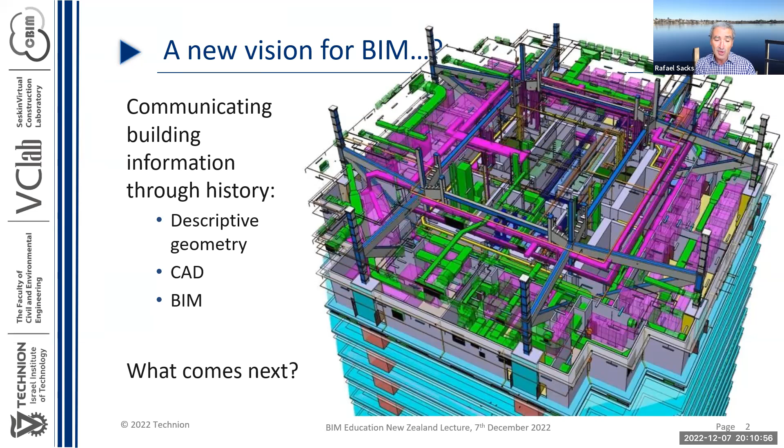So let me just take a moment to look at these 3 things: descriptive geometry, CAD, and then BIM. So I'll start with that historical context, and then we'll talk about current practice and where we are now, what we don't have and what our problems are still today. And then I think I'll touch on technology and process resources that we have available that might help us address some of those problems. And that will lead me to the future trends in BIM technology and process.

Okay, so launching right into it. I mean, we all know that the age of the master builders, particularly in Europe, but in other places around the world too, was a time where communication was rather difficult. Writing and paper were not that common.

And as you can see on the top right-hand side here, oftentimes the practice was to prepare a room, prepare a floor of clay or of other soft earth, and then draw out things in the clay and discuss that in that room, go out and build the thing. And when you needed a new drawing, you would come back, sweep the floor, clean it up, and then start again. That was sort of the graphic communication technology.

And that gave way in the 1700s, in the 18th century, to two key inventions that supported that communication, both descriptive geometry and parallel projection versus perspective views. And this really was quite a technological breakthrough. You can look it up in the link I've given here of Gaspard Monge in France, who summarized a lot of the understanding of what descriptive geometry was.

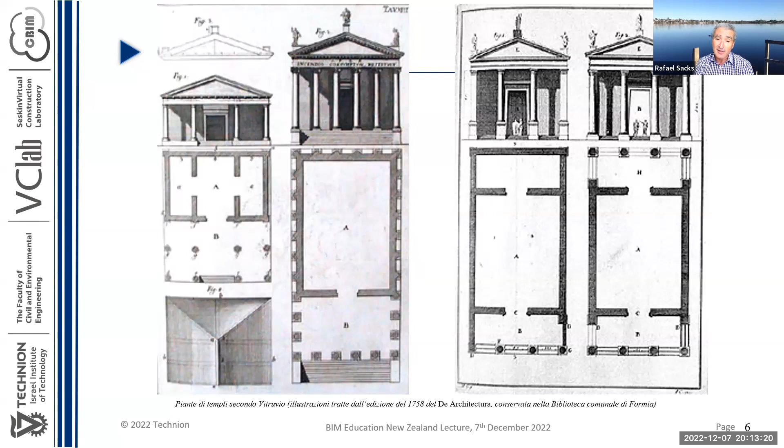And descriptive geometry, of course, also allowed people to prepare front views, side views, top views, and isometric views, all of which were unique in that they could be measured. You could measure them on the paper, and to scale, of course. So we have things like these parallel projections. You see on the right-hand side an isometric view where the dimensions are in proportion to what they are in reality. So that you were able to take a scale rule and work off something like that.

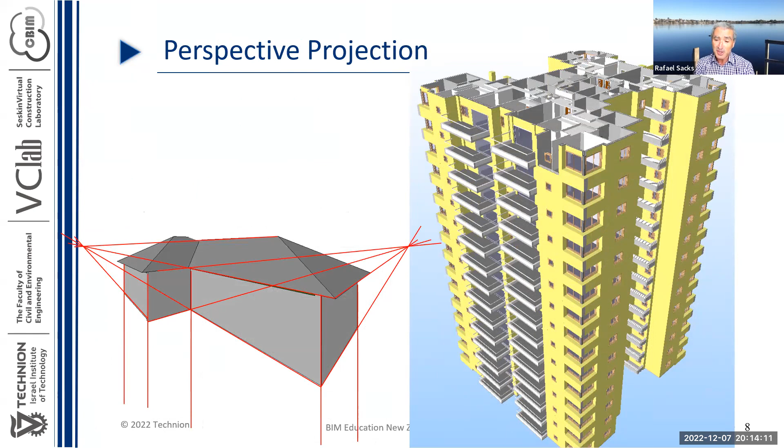On the left-hand side, a cross-section of the same building. And here quite clearly you see how the cross-sections, the dimensioning and so on became possible and led to regular drawings. And that's, of course, in contrast to the parallel projection, the perspective projection of the same building, which would look like this, and where naturally we see things in distorted form, and we could not measure or really use this for construction drawings.

And then of course, people took the technology of parallel projection and descriptive geometry and the layout of mechanical drawings and applied them with computers. So we got CAD, computer-aided drafting, which fundamentally took a mouse and screen to replace the pen and paper. But from a conceptual point of view, it's pretty much the same thing. Of course, it comes with huge efficiencies and accuracies of dimension, but not a whole lot more.

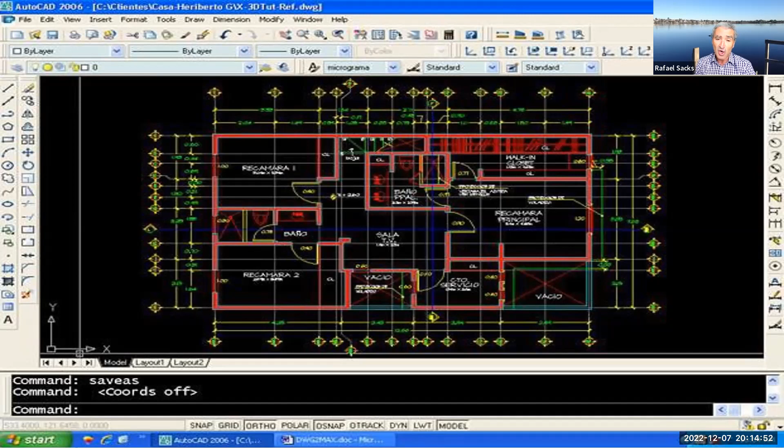And then we take a step forward, at least in imagination, if not in practice. This is a piece from 1962, which I guess I won't surprise too many if I tell you is the year I was born. But it's a piece that was done for the United States government, for DARPA. And Douglas Engelbart in this paper wrote about a future intelligent architectural agent, computer agent. 1962, a time even before punching cards.

So he's talking here about how the architect can move a pointer on the screen and give instruction to his artificial intelligent clerk to show him a perspective view of the hillside building and ask the clerk questions about, does the building meet code, and all sorts of other really wonderful things being imagined in 1962 as the future of intelligent computing.

And then when you have that perspective that this kind of text was already available at that time, you take a step forward, 13 years forward to Chuck Eastman in 1975, writing about a building design system, a building description system, which again is a computer system to design consisting of interactively defining elements, again, with a mouse and a screen, automatically deriving plans, isometrics, perspectives from the same description of elements.

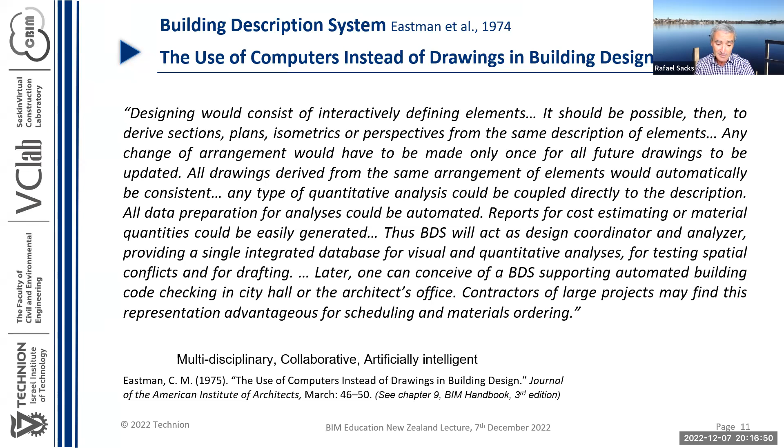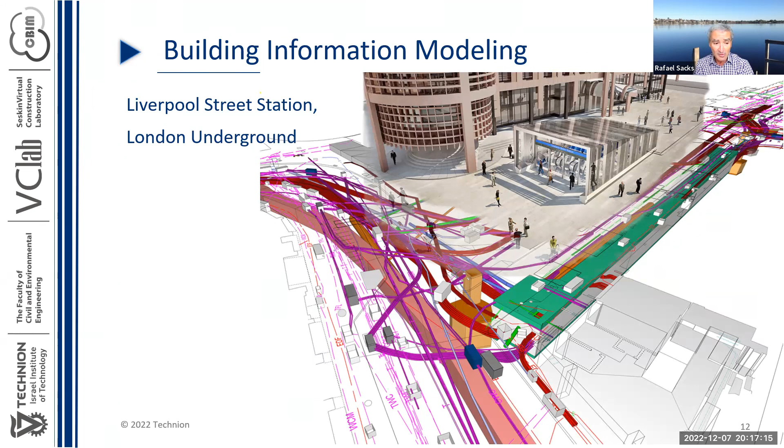Now we sort of more or less take for granted that we can do this kind of thing where not only can we model things in building modeling, we can merge it with GIS systems, merge it with intelligent survey systems, do system comparisons, clash checking, all kinds of weird and wonderful things that are pretty much accepted practice throughout industry now. So we've come a very long way in a very short time.

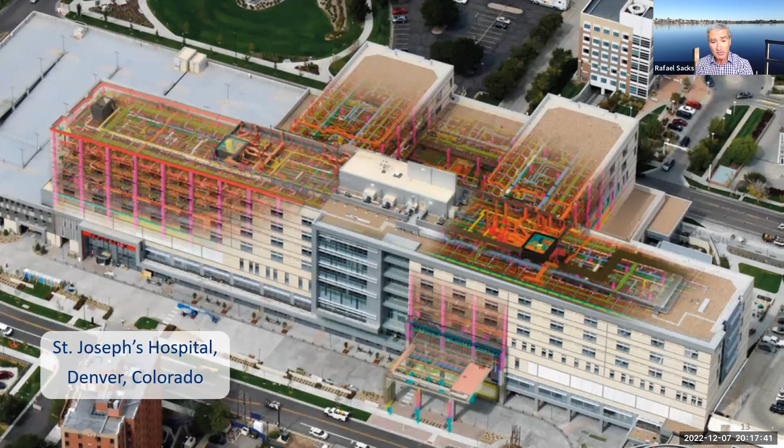You could think of this kind of progression from past to present in this way. This is from the past: publicly accepted standards from the UK from, say, 8, 9, 10 years ago, where they started to lay out this idea that we have level 0, 1, and 2. CAD, of course, being level 0, and then BIM, federated BIM models as being level 2. And again, with a look forward to level 3.

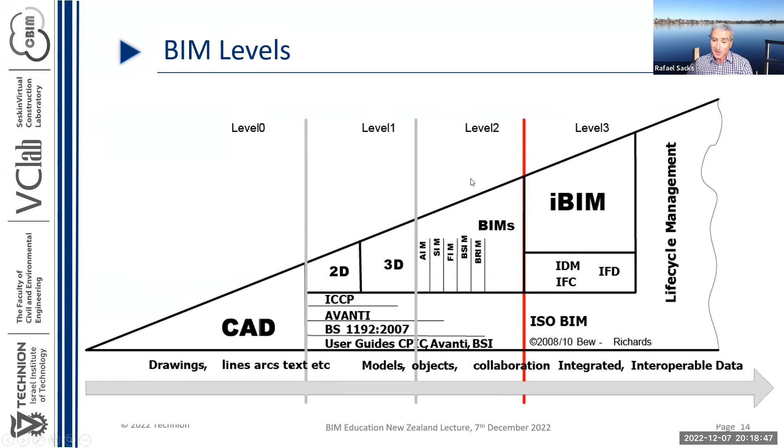And level 3, they broke down in the standard. This has now become updated a number of times, but you see that this iBIM, intelligent BIM thing, is still something that sits in the future, not in the present. Whereas these ideas of IFC and exchange and interoperability, some of them are very well developed. So level 3 is not one single thing, but it's perhaps how they viewed in 2010 how things would develop. The industry, I would say, is largely sitting at level 2 with a bit of IFC and interoperability thrown in.

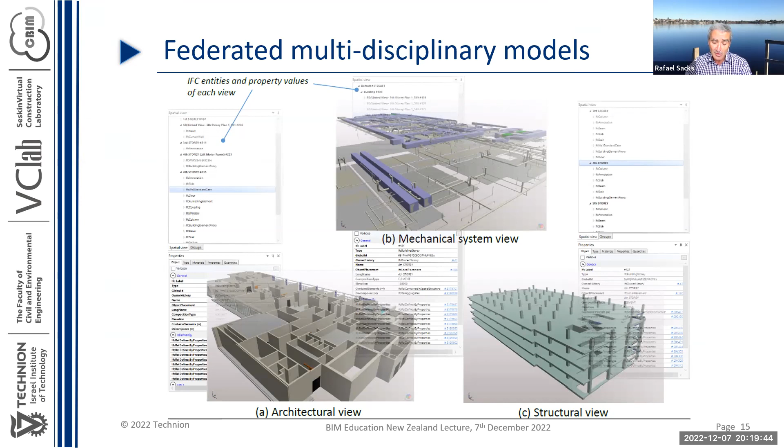So that plays out as these federated models where we have architectural views, structural views, mechanical systems, and each of those run in their own silo, and they're brought together from time to time to compare, to check, to coordinate, and then back to additional cycles of coordination and design. And most of that now is crystallized in the processes described in ISO 19650. So that's become standard practice for industry, and I think it's fairly well recognized. The use of common data environments for storing files, for then comparing files, and the procedures for working backwards with BIM collaboration formats and checking things and revising those components of the federated models.

You can see it here. This is from a building in Singapore called Maple Tree. Again, 2015, 2016, fairly recent, but already this idea of combining federated models is well established. And of course, we've been dealing for some years with this problem of interoperability. Some years, I mean, something like 30 years. And we see clearly that even today, we have multiple software working on BIM in one way or another.

They serve a great number of purposes, but it's not coincidental that things have evolved in this way, in the sense that different professions in the building industry have very highly specialized ways of working. And so those specialized ways of working lead them to have different conceptual understandings of the way buildings work. And that means that the software which embeds a discipline-specific ontology for each discipline have to be different. They work in different ways, they respond in different ways, and they allow the objects within them to behave in different ways, which means we have different software.

And then the challenge is to communicate information from one to the other. And that's challenging because the schema, the ways we understand the information, are different. Not to mention that we have confidentiality, privacy, legal considerations, and other things, and provenance of information and liability. So right now, most of the solutions we have fall into one of three categories: either direct interfaces between applications, where somebody writes an export for a particular software. We also have situations where some of these multitude of software applications have versions which can be embedded directly in a BIM authoring platform.

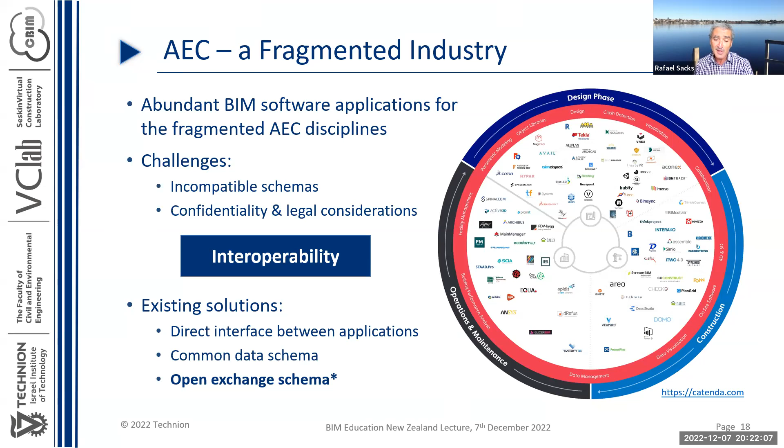And we have common data schema, like the open schema of IFC, which allow you to export and import from a neutral, widely accepted standard schema. So you have things like this kind of flow, where we use IFC within a workflow that begins mostly with architecture, export of IFC files, and then importing to structural software, mechanical software, others, export again, clash detection in some sort of special software, and then repeat the cycle and so on.

And as I said, the IFC itself is in ISO 16739, but this cycle of checking and delivering information and so on is encapsulated in ISO 19650. And so it's become fairly well established. Countries and companies, and projects for that matter, have BIM execution plans. And these are fairly well established, but they're not without their problems. And those mostly have to do with the fact that we have sequential design. Things are done in series rather than in parallel.

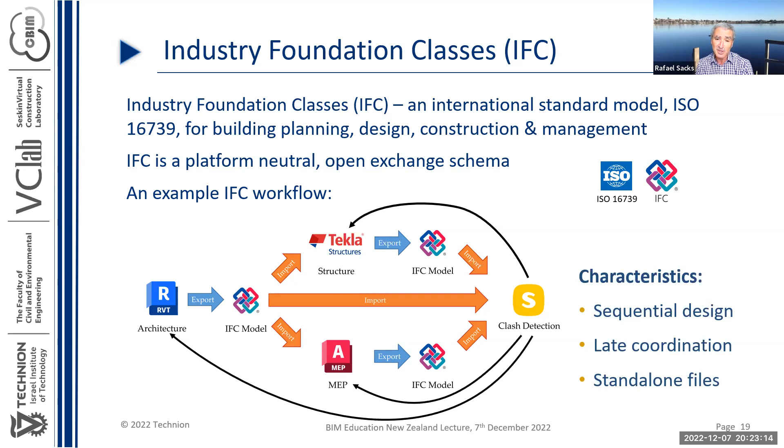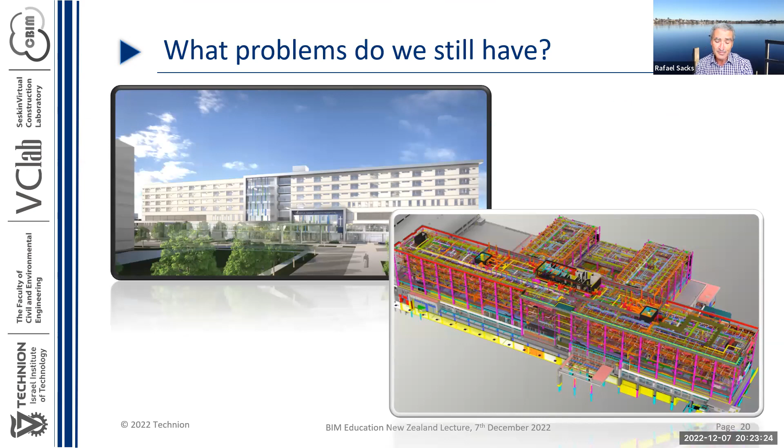We have very late coordination in the process, and it's iterative. And we have standalone files, which really don't contain much information beyond the very narrow scope of each particular profession. So we can ask, what kind of problems then do we still have? And I'm going to list three or four.

The first one is this thing that we know from the old days, let's say, that we still have this fragmented nature and the idea of passing things over the wall from one step in the process to the next, or from one profession to the next. And in general, a lot of rework, a lot of iteration, lengthy times for project development and construction. And in the end, often clients who don't necessarily get what they expected or what they wanted.

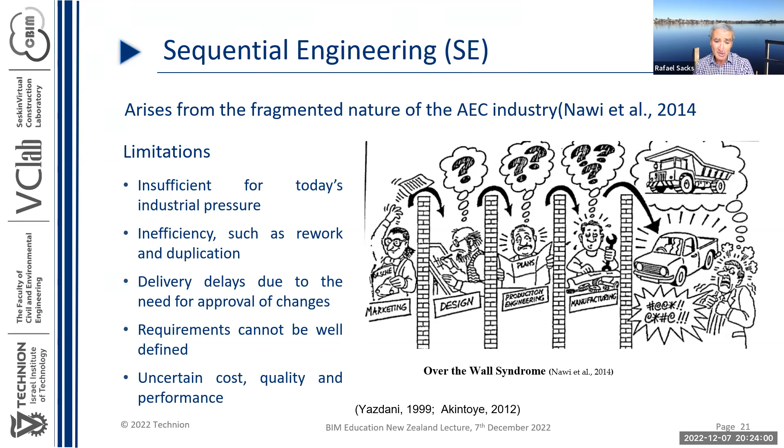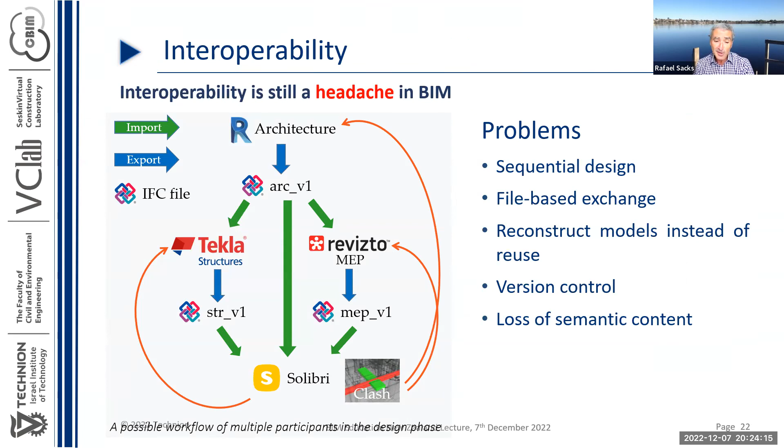And with some of the problems listed here, these are not new problems, but they seem to be fairly persistent. And as I said, interoperability is to an extent solved, but not entirely. And we have these problems of reconstruction and handing over and loss of information, especially loss of semantic content. And what do I mean by that?

What I mean is that, if you consider a Revit model, then within the Revit model, the objects have certain behaviors which are constrained by the way the software is built. Columns support beams, beams support slabs. If there are overlapping volumes in a structural model, the software is intelligent enough to do joins of that geometry and to take care that it's not reporting double quantities for volumes that overlap. By the same token, in an architectural model, it may mean that there is no meaning to a window outside of a wall, and so they don't exist outside of walls.

And that kind of design intent, a design understanding of behavior, is maintained automatically by the software. But then you come along and do an IFC export, and you lose a lot of that. So you lose the parametric geometry, you lose the aggregations, the parts sometimes. You may lose the functional relationships, but in particular, you lose the constraints, the parametric constraints. And by parametric constraints, I mean exactly those things that dictate the logic of the way the building works for each particular design professional domain.

Let me stress this even more, because it's not only that you lose semantic content that's in BIM software, but sometimes there are aspects of semantic content that were never in the BIM software to begin with. And that's particularly across disciplines. Within disciplines, software does it quite well, but across disciplines, it doesn't do it very well, probably not at all.

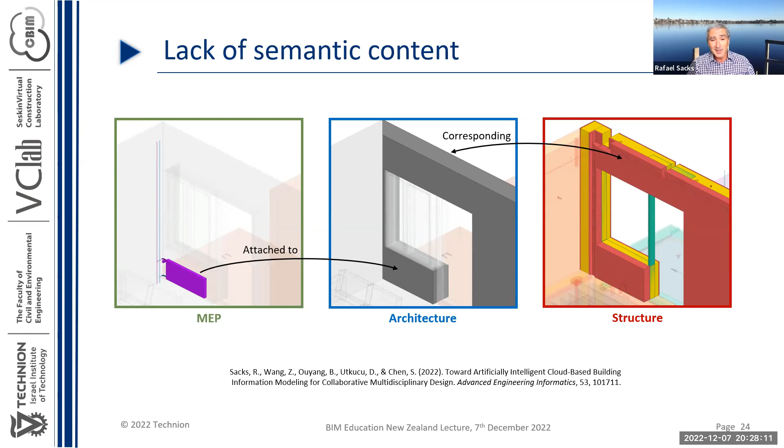So you would at least expect that this kind of change would be accommodated in the software and at least presented to you as something that you could authorize or reject, but you wouldn't have to do the drudgery work of actually moving the stuff or editing it or changing its dimensions and so on.

So I could sum up like this and say that the way we work with multiple federated models is here to stay. That's because of the professional specialization that we have, and that's not likely to change. The fact that models lack semantic content is a block, because it limits the degree to which the software can actually respond and do things that we expect it to do.

Concurrent design, as a result, is still very difficult, and that's part of the reason why we have sequential design. We would rather wait until the architect does everything before I do my structural design, because then I assume I will make fewer changes and I'll have less drudgery and less need to maintain consistency when things change.

Managing design variations is very cumbersome. If we have different versions of the same thing and we're considering different alternatives, there might be minor alternatives within a whole building, but it requires us to save different files of the whole building, which is truly cumbersome. And collaboration relies on imperfect interoperability, as I've discussed. And finally, the file-based storage, the technology that we use is really quite difficult, because that dictates our difficulties with version changes and consistency maintenance and with relationships across models.

So what next? What might we do to address some of those problems in the, let's say, the medium and the long term? Well, let me give you an example of the kinds of things that we could imagine we might be able to see. And what I'll show you here is a piece of work from a PhD student here in our lab, who is employed by Trimble in Finland at the Trimble Development Center, and very much engaged both in research but also in their product development department.

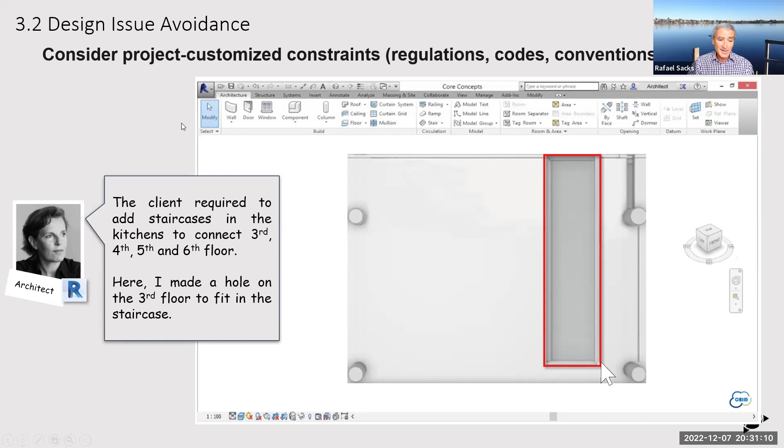And the architect says, oh, okay, I'm going to go ahead and imagine I open up a hole in this floor, and that rectangular hole is going to be filled by a staircase, an open staircase, which people can use to move from third, fourth, fifth, and sixth floors. And so that's the architect's idea in terms of the space planning. And then what happens is you can imagine that the system, the software says, oh, this will cause a design issue with a structural model.

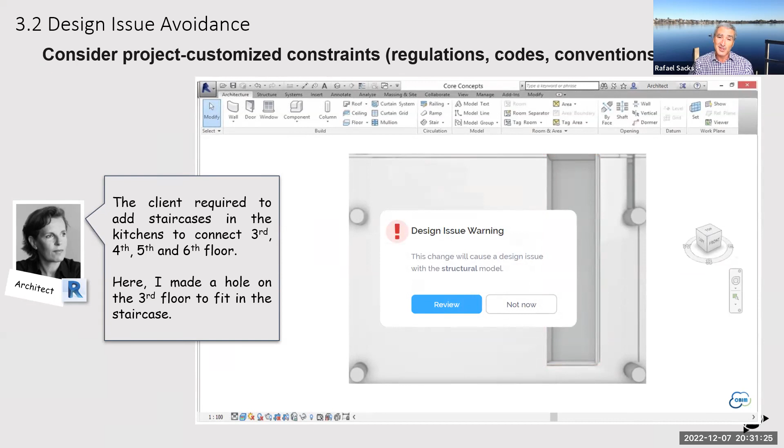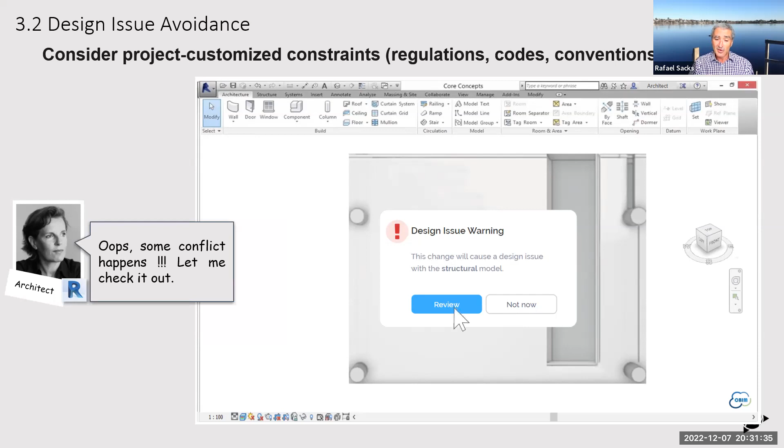This is the intelligent agent, if you like, looking over the shoulder of the architect and saying, I'm intelligent enough to tell you that this is going to cause an issue, and let me show you what the issue will be. So now the architect says, okay, let me review this. So some conflict's going to happen. Let's check it out. So the system then says, okay, let me explain to you what's going on here.

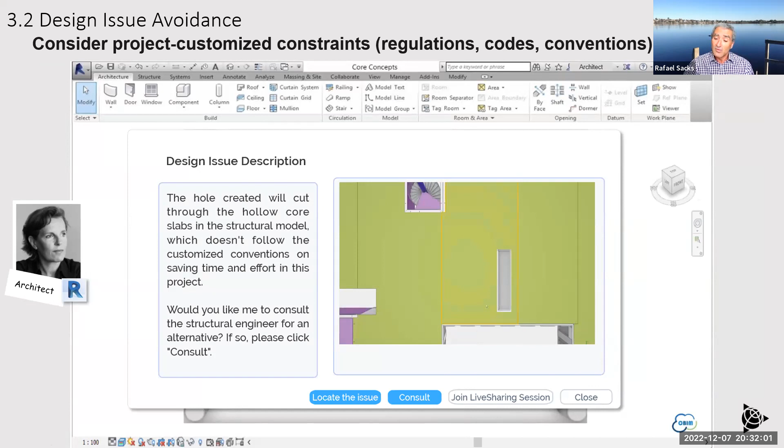Here's the floor of the building, and here is the slab area where you want to change. And if I open up the model in this area, there is a hollow core slab there. And if you cut it in that direction, you're going to cut through all of those hollow core planks, which is a real challenge for the structural engineer to cope with. So what would you like to do? So this is the problem.

So the architect then says, okay, I understand the design issue. Let me raise this with the structural engineer. Now we imagine that the structural engineer is at some other location opposite their software, and they now receive a request. And it says, oh, the architect is busy considering making this change to this building model. Would you like to review, because they have an issue?

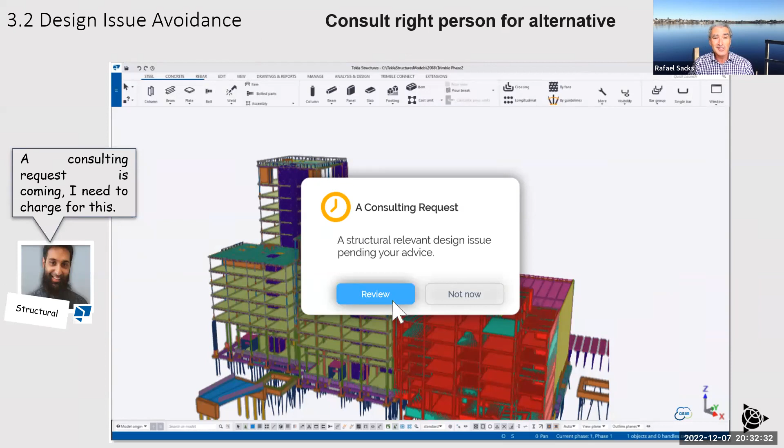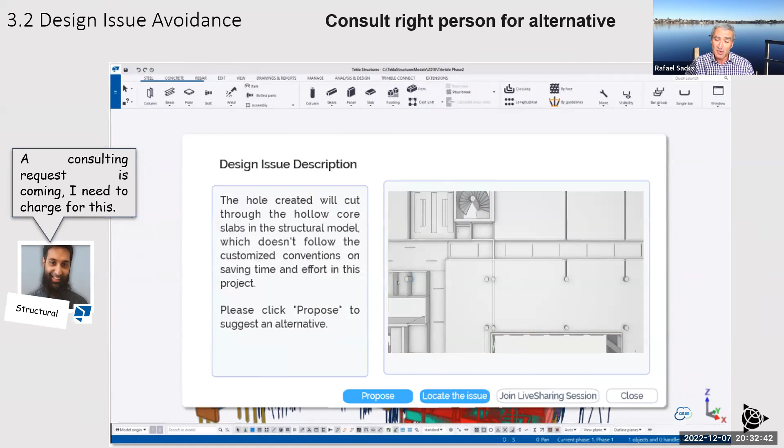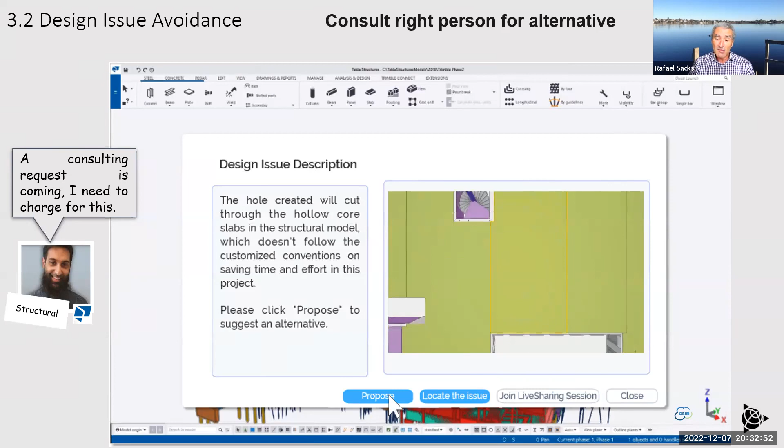And the engineer, apart from thinking, well, I can charge for these hours, is going to say, okay, let's review this. And again, the system displays to the engineer what the potential problem is and what the architect would like to do. And then the engineer would say something like, oh, okay, interesting. How about, instead of doing this, we rotate that opening by 90 degrees so that it's parallel to the thing. So this is the engineer suggesting a fix.

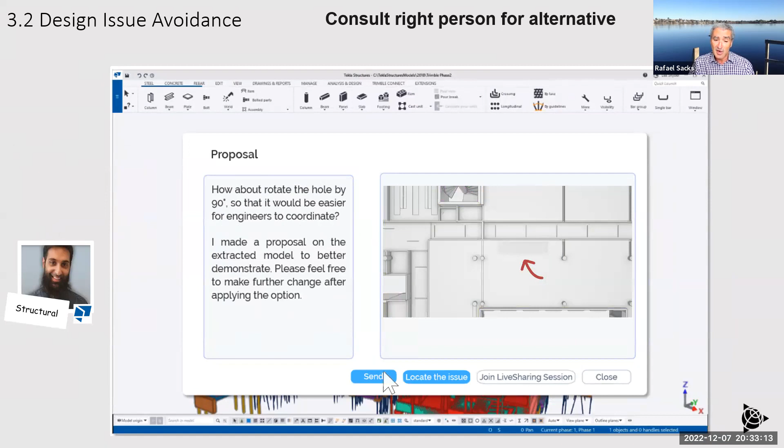And the engineer might say, okay, that's a much better idea, because that's going to be much easier to support that missing plank or make the hole in the area of a hollow core plank. And it's going to then suggest that back to the architect. Now, if we go back to the architect screen, they might receive that kind of communication from the structural engineer, who might say, yeah, you know what, how about doing this?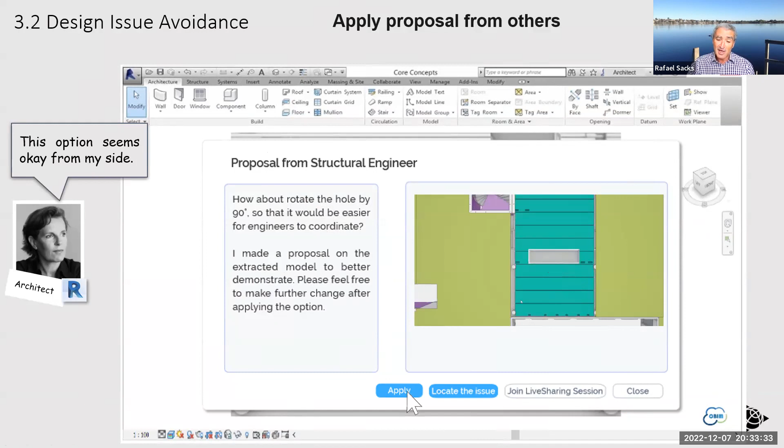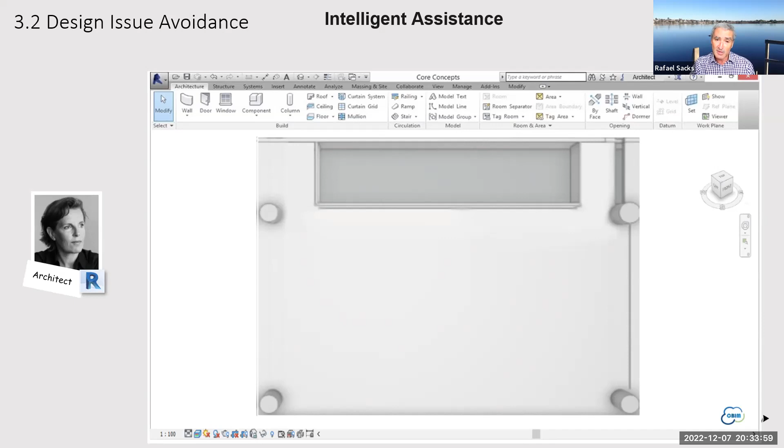And the architect could then say, yeah, okay, I'm happy to do that, and go ahead and accept that kind of fix, and not necessarily in the same place, but adopt the basic principle. And that kind of consultation, apart from being online, could be assisted or aided by an intelligent system that was able to determine that conflict and raise it as an issue right at the beginning, rather than waiting for another month of design cycle and a great deal of work on the part of the architect before realizing that this was not going to fly.

So if we'd like to have that kind of cross-disciplinary intelligent behavior that expresses design intents, what we really want to do is utilize, I think, some of these opportunities. Concurrent engineering, AI applications for semantic enrichment, storing models as objects in the cloud rather than as files, and linking data across models in that cloud. So let me just list these 4 things, because they're all aspects of research over the last 20 years, which have been explored and I would say matured to some extent, some more than others.

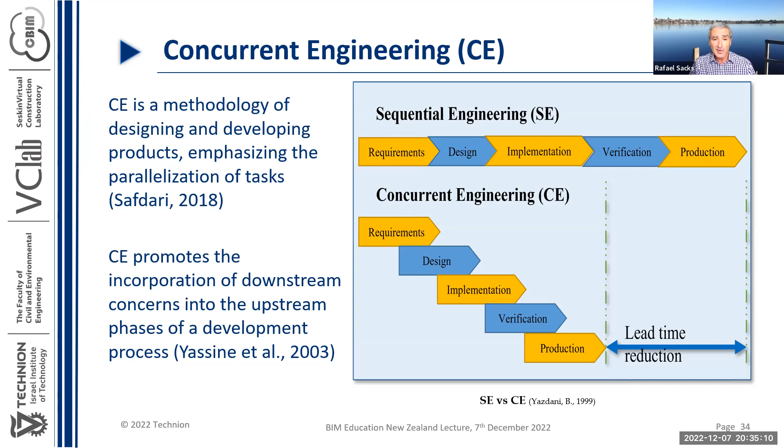Concurrent engineering is basically the idea that we can do things more in parallel than in sequence, with the reductions in duration, but also with improvements not only in duration overall, but in efficiency, and creating less rework and less waste of rework when we design things that afterwards have to be iterated and changed. So we expect to have shorter development times, better product and information quality, lower development costs, and perhaps some enhanced collaboration.

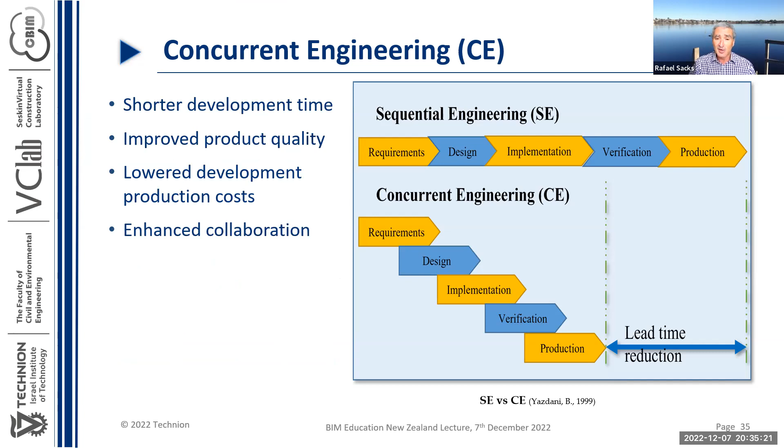Now, semantic enrichment is this idea that you can apply AI tools to interpret and enrich semantic content in an automated way, so that models can, even on export or across domains, express their design intents and their intelligence in an explicit way so that software can read it. I mean, the thing is like this, that if you think about a BIM model, you think of any Revit model or Tekla model or MicroStation or Open Building or whatever software you're using, and you create a model, you generate geometry, you generate properties of those objects, you add that information.

And you probably add some relationships because you have aggregations where, I don't know, a wall may have different layers. A room may be bounded by different walls and ceilings and floors and things of that kind. So you do have that, but there's another whole set of information that you don't model. There might be details with geometry that you simply take for granted that everybody will understand, or actually doesn't influence your design, or for whatever reason you don't model it. There's implicit information. There are implicit semantics as well.

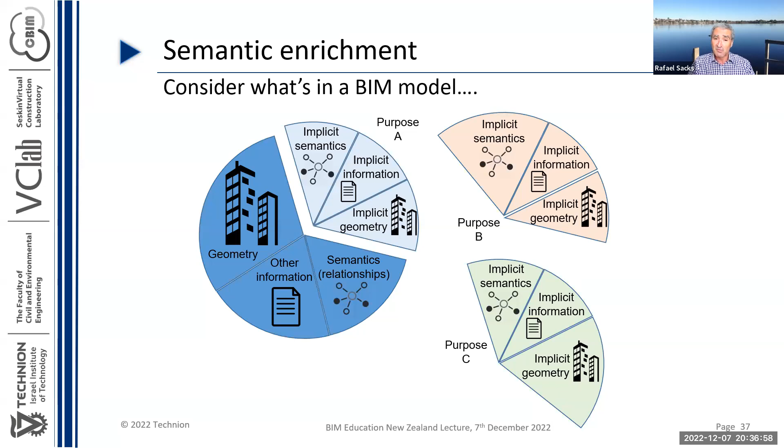And then when you consider that there are different purposes of BIM models, maybe A is architecture and B is structural engineering and C is MEP, to use that triad again, then each of them, although you all may have the same geometries and all see that, you each have different understandings of the implicit information that's not there in the model. Like you take it for granted.

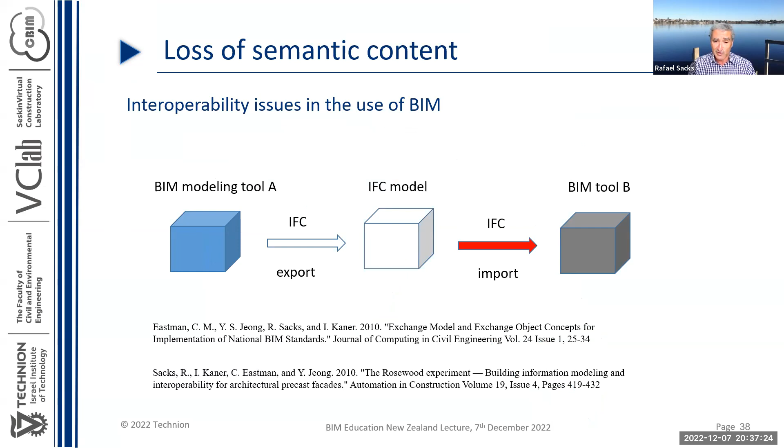So to do a semantic enrichment would be to be able to use AI to identify that and to be able to say, yes, actually, this is the bedroom, this is the bathroom, there is a connecting door between them, and that kind of level of semantics would be added into the model.

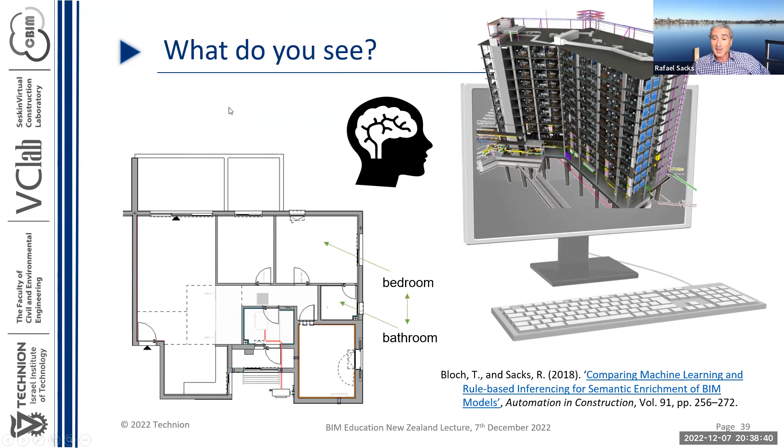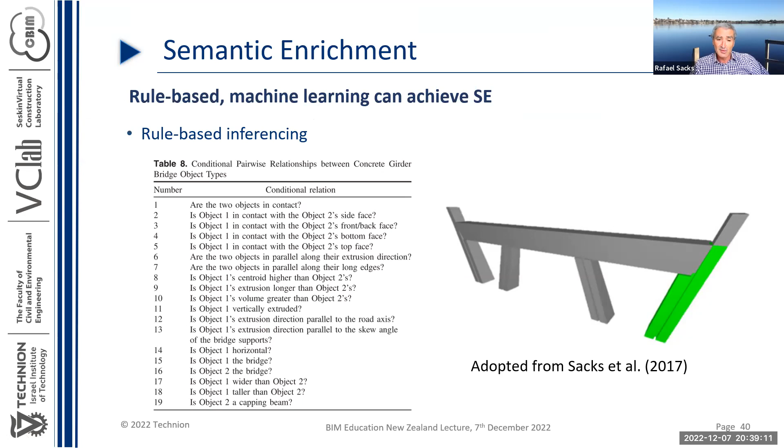We've been trying to do this for some time. We had a project in bridge engineering, and we were able to create sets of rules that could identify components. This is a bridge pier, and the rules could identify the different components with fairly close to 100% reliability, and add in relationships like what supports what, what is aligned with what, and what are the intents of the design.

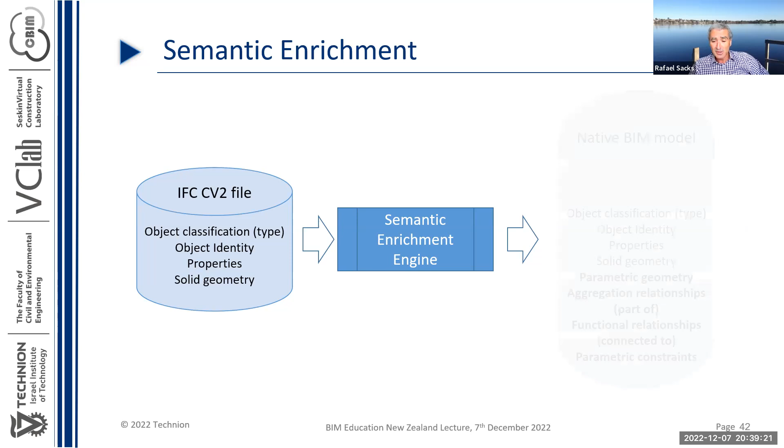So the idea is then very simply that you might be able to take an IFC file that does not have a lot of that implicit information, use an AI tool, and add that back in. And that's partly what I'll be showing in a moment.

And then the next opportunity we have is that people have been working for some time on these ideas. Here's a piece of work from Jacob Beetz, originally in Holland and now in Germany, of having a BIM server in the cloud, where you would not have files but rather objects. And those objects would be delivered or served, if you like, to your own computer on your desk.

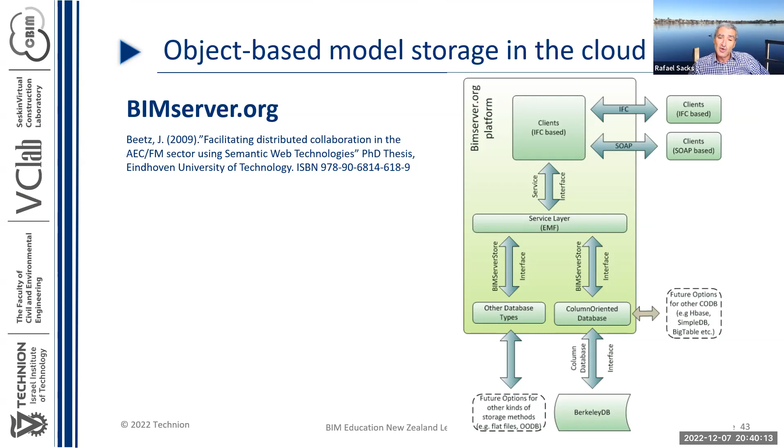And so you could bring down whatever objects you needed to work on them, and upload them back into the cloud. And that's mostly relevant from our perspective because, at least in your mind and in the way the software behaves, we can break the file constraints.

We talked about this actually in the BIM handbook, recognizing the challenge of object-based model storage in the cloud, and at the same time recognizing that this requires sophisticated technology. We wrote this in 2016, 2017, and it is now becoming fairly practical with today's technology. But of course, it requires different BIM processes and software ideas.

So one of those ideas is offered by the work in linked data models by many people, including Peter Pauwels' work I'm showing here. Here the idea is that we have clients, your CAD or your BIM system, on the outside, and then a reflection of those objects in the cloud for each tool.

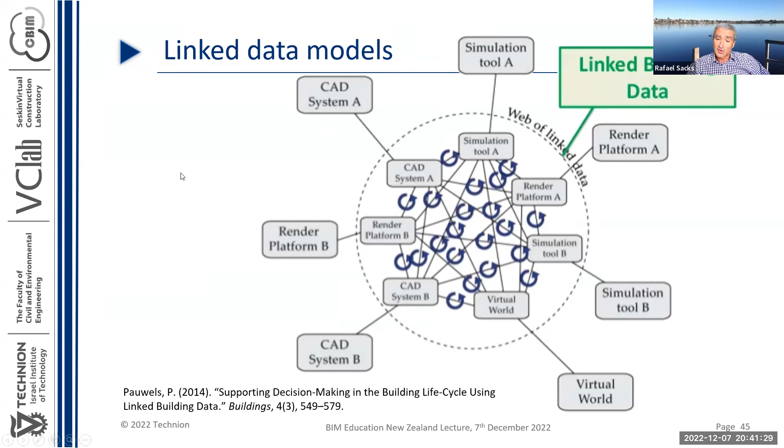But then in the cloud, you might have the objects in each domain linked to individual objects in another domain, creating this network of meaning which exists across domains and across disciplines and helps us do clever things.

There are some examples of this, and the basic technology is there, not by any virtue of the construction industry, but by virtue of linked data technology standards and other solutions, which I don't want to delve into too deeply, but there have been prototypes of things like this VCon idea from Eindhoven already from 2015.

So if those are our problems, and if those are the technologies available as tools in our toolbox, then we can begin to imagine how next generation BIM systems might look. And what we really would like is that our BIM systems not just be modeling tools,

but that they be artificially intelligent, semantically rich, collaborative, supporting concurrent design, that the models within them be consistent in and of themselves, that they be multidisciplinary, and that they use graphs. Graphs are our way of storing these things in the cloud and creating the linked data.

And if we break that into technology and process, then 4 of these relate specifically to the way the technology works, and the other 4 relate to our processes, the way we design buildings and the way we think of design processes.

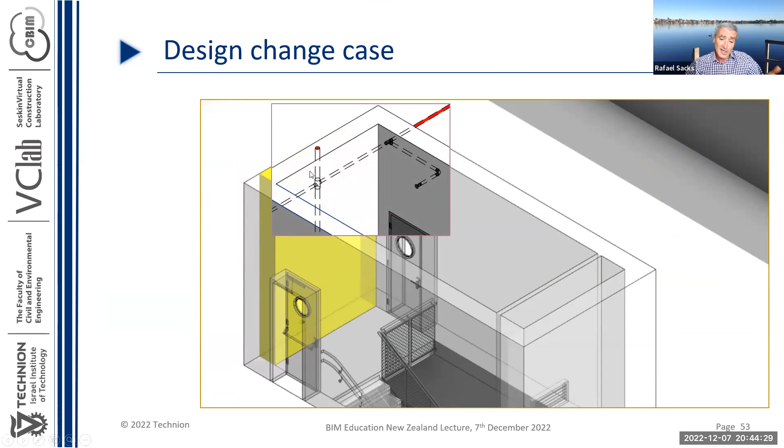And so the design change that the architects wanted to make was to move the wall, I think 60 or 70 centimeters to the left in this case. And you see then that the doors are now wider and the wall is moved. Now, what's relevant here is that in this model, there are sprinklers and many other things, right? But we'll just focus on the fire sprinklers. The fire sprinklers were positioned on the left-hand side. On the outside of that wall, there's a pipe, and then the sprinklers are all modeled on the wall.

And if I flip the model around 180 degrees, you can see here that after they made the design change to the architecture, when they came back to look at the federated model, this is what they saw: in the federated model now, the sprinklers, the vertical pipe and the horizontal pipe, which are supposed to be attached on the outside of this wall, are now embedded in the concrete, which is wrong. So the challenge now is, obviously we need to move that pipe outside. As I showed you with the radiator earlier, the design intent is clearly that the pipe be mounted on the wall on its outside.

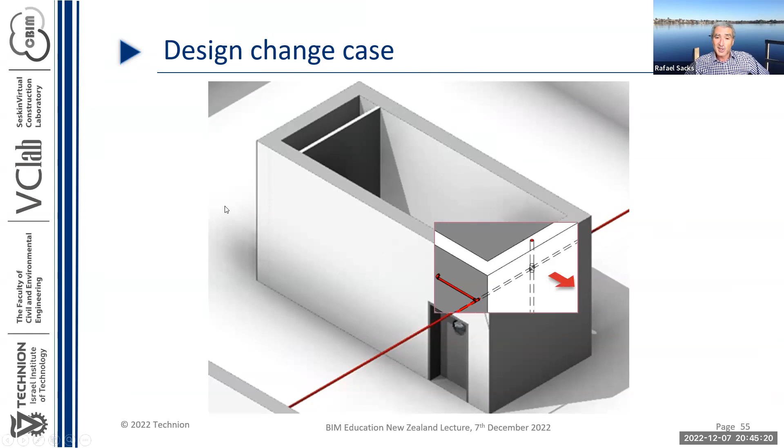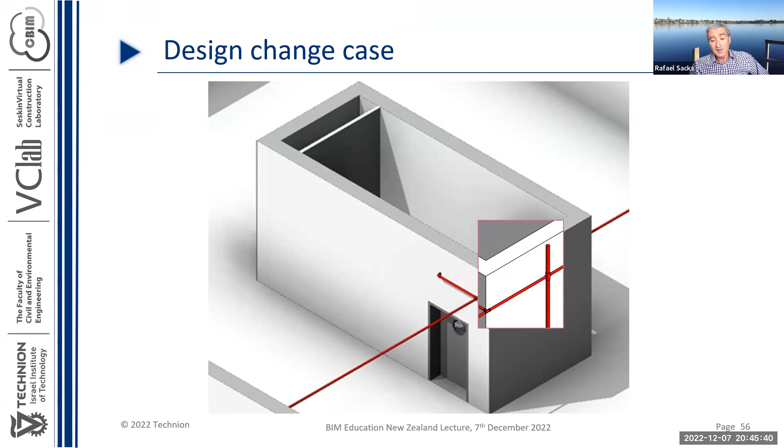So the situation we would like to achieve is, ideally, the software would come along and say, okay, clearly that was your design intent. Would you like me to move that pipe outside? It may ask people from numerous professions for approval, but at least they would just say, yeah, good, and we're all done. So that's the desired situation. So we said, okay, how can we do this in software and build and implement a demonstrator for this? And the way we do it is this.

Firstly, in terms of the linked BIM, we consider that we're going to have a representation of the BIM models, not in a file in Revit or whatever system, but as individual objects in a cloud. And so here you see, I'm going to annotate here. This architectural wall object is a node in a network in the computing cloud. The same for the structural wall object here and this MEP pipe object here. And then we add into the cloud relationships that give us these equivalents. So we see that this architectural wall is equivalent to or corresponds to that structural wall.

By the same token, we derive, or understand automatically, that the pipe, in a spatial sense, is located at some x-axis offset to the right of that wall. And going one step further in terms of intelligence, not only is that a spatial relationship between the vertical pipe and the wall, but we can also infer a design constraint. That design constraint says that the bracket connecting the pipe and the wall must have a minimum value of 20 centimeters because we want to have space for inspection and maintenance. And that's in the X direction. So this constraint constrains the pipe to be at least 20 centimeters outside of the wall.

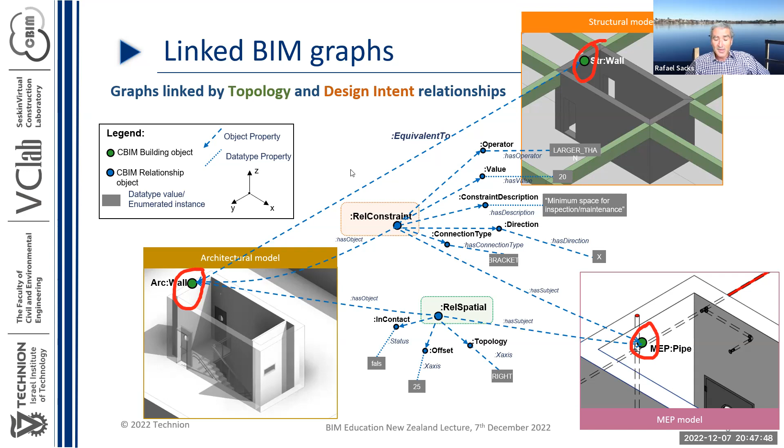Now, the first constraint is fairly easy to identify and supplement automatically because we can do geometry comparisons between the models. The other constraint requires that we infer an understanding of the intent of the designers. So the way that we build up that solution is the following.

We start with, if we look here on the left, an architectural model where we have objects in the architecture. And the first thing we do is we have a piece of software that can take this BIM model and transfer it into the cloud as a graph.

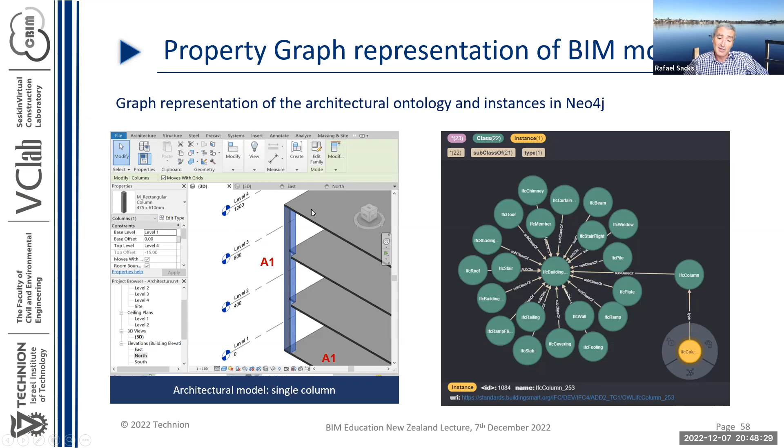And what you see on the right-hand side is here on the very right-hand side, an IFC column class. It's a type of object. And we have a particular instance, this yellow node at the bottom right, and that's column 253 in the graph. So we represent in the graph, in the cloud, what we have in the model with its geometry and with its names, properties, etc. And then we go to the structural model and we do the same thing.

So now we're looking at a structural model, in this case in Revit, but it could be in any software. And in the structural model, the engineer has modeled this as 3 separate columns, because that's the way they'll be designed. They will have different reinforcement. They may even have different dimensions, unlike the architect who actually doesn't care about that. All they have is particular location really for a column.

And so we see on the right-hand side in the corresponding structural graph, we see these three columns, which are of type IFC column, and they're structural columns. And they too exist in a different graph in the cloud, but in the same cloud space. So what we have now in this cloud space is we have an architectural domain property graph, and we have a structural domain property graph.

And you can see that the architectural column A1 is there as a node, and the other 3 are there as nodes. They have a type and they belong to a type hierarchy, but that's not so important for me right now. What we want to do now is create the relationships between A1 on the left and the structural columns on the right. So if I present it this way, what we are doing is we're adding new nodes into the graph, and those new nodes represent those relationships.

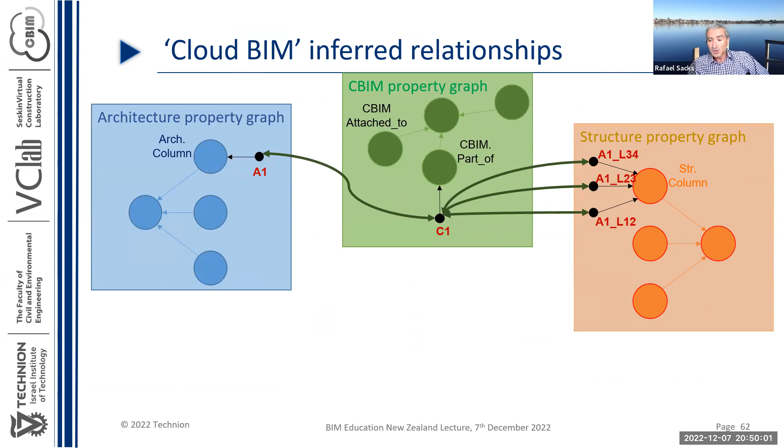So you might have here on the left-hand side the A1, on the right-hand side the structural columns, and the node in the center represents a correspondence relationship. So it's capturing the intelligent relationship that column A1 in the architecture corresponds to these 3 columns in the structure.

And by the same token, if I had a pipe here, in this case, a drainage pipe, outside of the column, I could do the same thing. I could have an MEP model with a node representing that pipe. And here too, I could have separate relationships where this attached to a relationship tells us that the pipe is attached to the architectural column and it's attached to the structural column. So I actually have now 3 different relationships: the pipe and its relationships to the different columns, and the architectural to the structural columns.

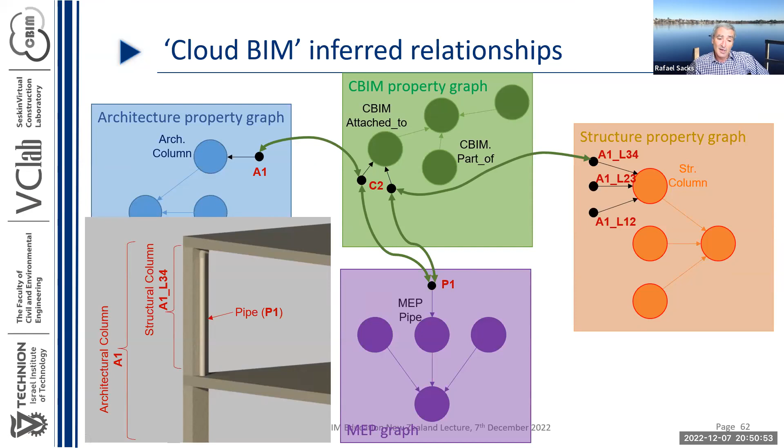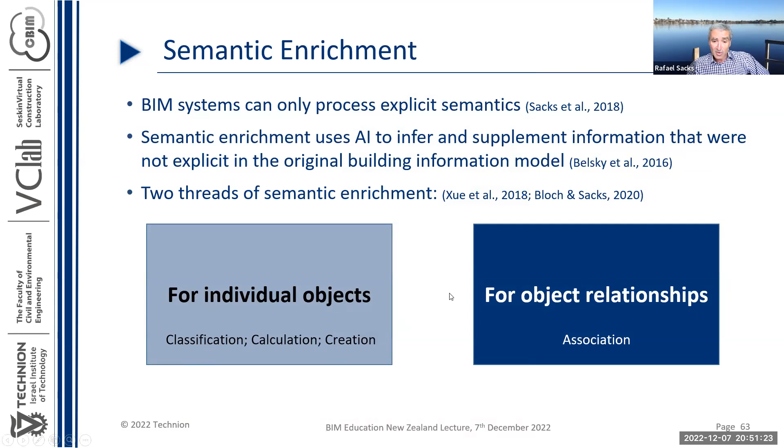Now, how do we infer that automatically? So mostly BIM systems can only process explicit semantics, and we have to make it explicit. And here we come to the semantic enrichment step. And there are two things we need to do. We generally need to classify objects, to identify that something is a column or a beam or a door or something else. And then we also have to infer the relationships between them, which is what I've just shown you between the different columns.

So we first define what we call an ontology of those relationships. What kinds of relationships can exist? And it turns out that so far we have discovered three different kinds. Spatial relationships, which are topological. They say that one object is below another object, next to, in contact with, enclosed within, containing another object, and so on. And those relationships generally can be in any of the three primary axis directions. Those are all the spatial ones.

The functional relationships have to do with things that serve one or another thing. So things can be part of another thing, a window being part of a wall, or a layer, a structural layer being part of an architectural wall. These are things that are functional relationships and then dictate how things behave.

But then we also have constraint relationships, which generally express design intent, and they express the way that we understand buildings to work. So these are the kinds of things where within a discipline, we know that a window must be within a wall, but if it's across disciplines, it might be the kind of things we've seen where a pipe must be, or we intend it to be, attached to the outside of a wall.

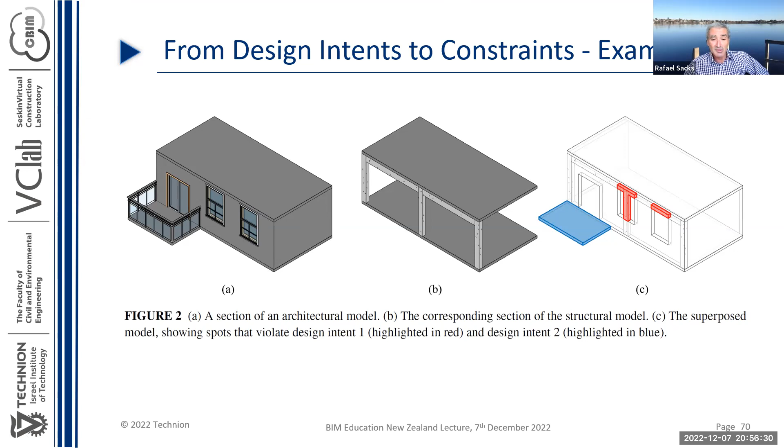So can we define that kind of design constraint, design intent, in a mathematical way? And really what we're trying to say here is that structural model elements in a building superstructure should never protrude from their corresponding hosting architectural model elements to avoid unintended structural exposure. And if you want to say that in a mathematical form, you could say that when you subtract the architectural objects from the structural model element geometries in Boolean form, you should end up with an empty set. So there should be no structural geometry that can remain after you do a Boolean subtraction of the architectural geometry.

And that can be applied to the whole building, but it can equally be applied to sets of objects like a building's facade or its floor. And design intent number 2 here, we express the idea that architectural slabs that make up the floor of a story should always be supported structurally throughout their horizontal extent. We don't want to have a model with an architectural floor which has no structural support. And by the same token, we don't want to have structural supports in areas where the architect doesn't require them.

And that breaks down. And again, you can express this as the set of architectural elements that create a floor on a particular level of a building. When you subtract all the structural floors from them, you should have an empty set as a result, because we don't want any architectural elements that have no structural elements supporting them. And it turns out that you can create these kinds of mathematical Boolean expressions to give meaning to these design intents for quite a number of cases.

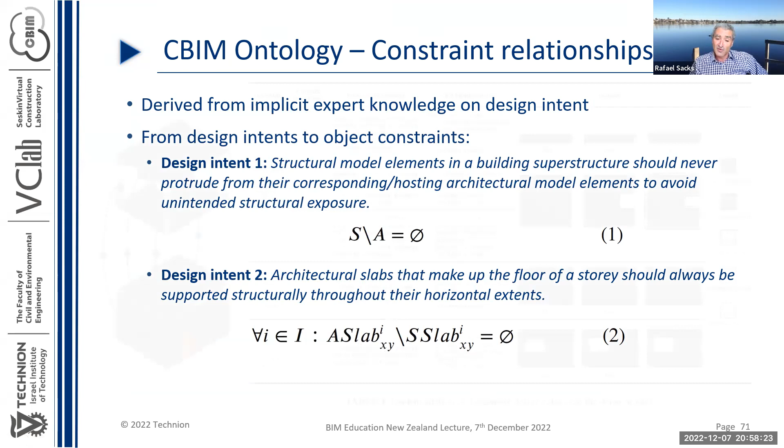And if you can do that, then you can begin to express them in software. And I won't take time on this. I know that we're coming to the end of our hour, but they are in the paper, but I'll explain to you how this works. So we're able then to use those things to write rules that can determine these situations. And now you see how it plays out in the practical example.

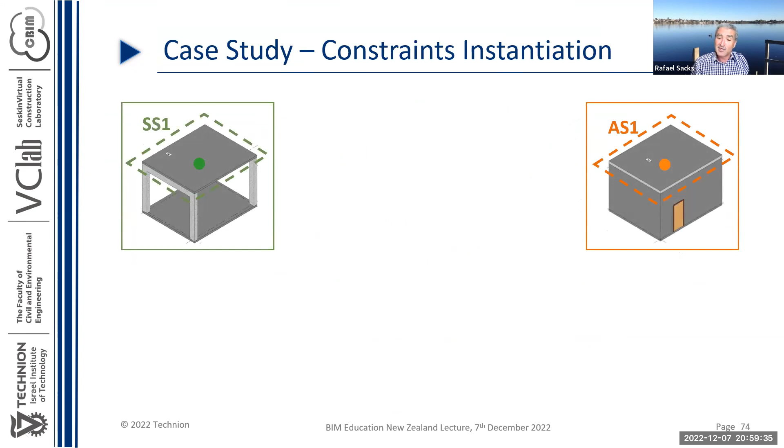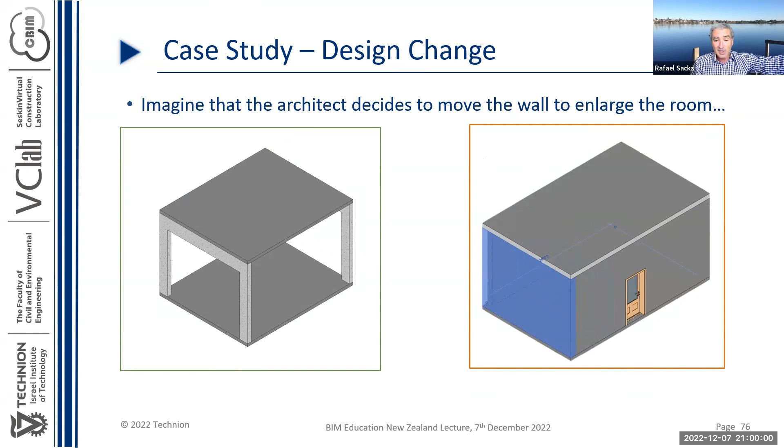So if an architect in their client software decides to move one of these objects, like let's take the wall on the right-hand side and decide to move it to make the room bigger, well, that should, in an ideal world, automatically have the impact on the structural model that the structural engineer should receive a notice and say, oh, the architect would like to move that wall such and such centimeters to the left. And actually, because that wall contains or is implemented by this frame that consists of 2 columns and a beam, then actually that frame should move an equivalent distance to the left.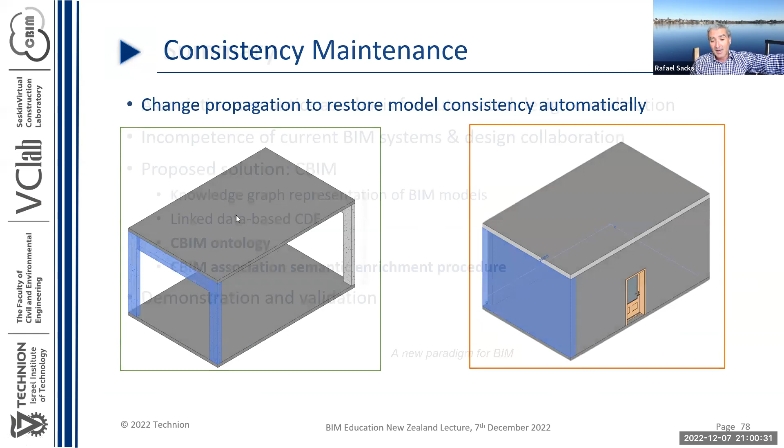And if that happens, then naturally the ceiling slab and floor slab should move with them, because equally the architect has extended those slabs and there are equal design intent relationships between the floor and the slab. And that's exactly the kind of change that we've been able to demonstrate by creating prototypes of this kind of software.

So in summary, I guess what I'm trying to say here is that if we're able to add in much more semantic meaning into our models and create that semantic meaning across disciplines, and we're able to capture all of that in a cloud representation of the whole model, but not as files, but rather as individual objects, then we can achieve much more collaborative and concurrent design paradigms. And that requires us to have knowledge graph representation. It requires linked data. We need to have an ontology of all the relationships and the design intent connections. All that is implicit today needs to become explicit.

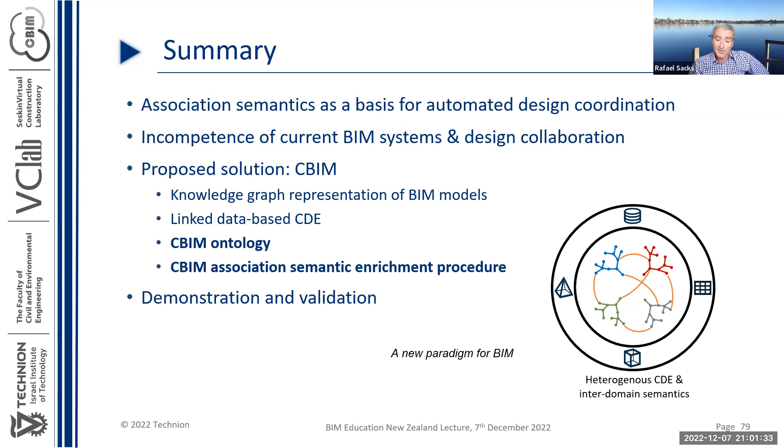And we need to have an additional layer of intelligent software that can apply and suggest corrections when we violate those constraints that we know to exist. The benefits are numerous. Some of them I'm listing here, but we might be able to make clash checking obsolete, because maintaining model consistency would be a more natural thing, in the same way as an architect doesn't need to consciously maintain consistency between windows and doors and walls. We can extend that logic across all of our models.

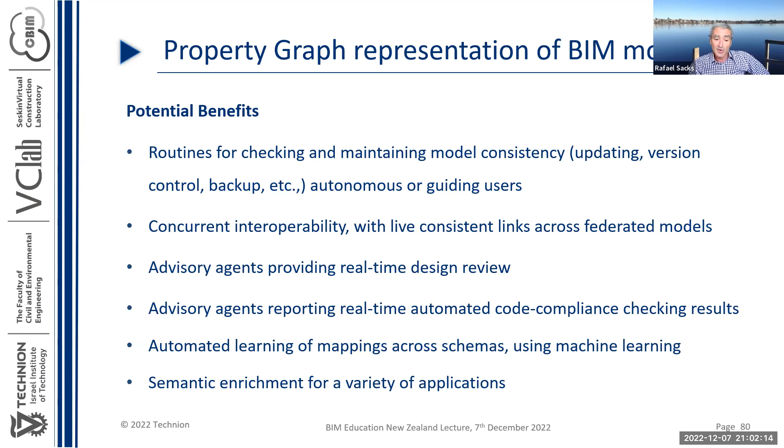We may be able to have concurrent work, advisory agents. We could have more intelligent design agents suggesting different things. We might have advisory agents reporting real-time code compliance violations and things of that kind. Much easier to do that when you know information across disciplines, and so on.

And so what I'm suggesting is that as research goes ahead, and as these things become more and more adopted into technology and vendors implement them, we are likely to see much more artificially intelligent, semantically rich, collaborative, concurrent, consistent, multidisciplinary graph and cloud technology in BIM. And so I'll stop there and perhaps open for broader discussion.

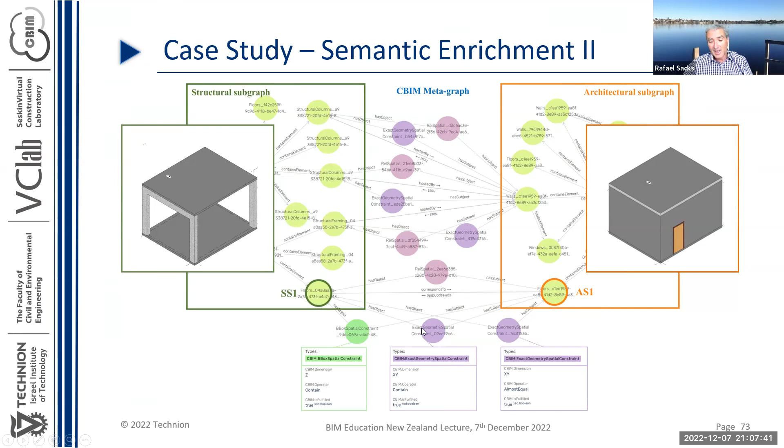Right. Okay, superb question, because it allows me to take this one or two steps further. So what you're seeing here is a set of instances: nodes that represent objects, structural columns and architectural objects. And in between, these are nodes representing concepts, the relationships we're talking about. Some of them are the design intent relationships. And those are all defined in terms of their class belonging by this ontology that I showed before.

And this is not the last version, it's a work in progress, so don't see this as something final. But the ontology represents that set of understanding of relationships, spatial, topological, and design intent. Now, you put your finger on two really good parts of the question. The first is, how do we know what those design intents are? Before we can infer them in any given model, we have to characterize, classify, and define them in the ontology. So we have to derive them from somewhere.

And you're absolutely right that at this moment, the main source we have used is expert knowledge. And expert knowledge right now translates to our experience as architects and engineers, and our understanding of how buildings work. When I say our, I mean our research team. The next step would be to go beyond the research team and do a sort of knowledge elicitation step. But we know from expert system research through the 1980s, 90s, and early 2000s that that's very challenging, and that different people have different kinds of expertise.

And not only that, but many experts find it very difficult to express their understanding in ways that can be computerized or expressed in mathematical expressions. So while I do think that will remain the main way we do this for some time, because a lot of those design intents are fairly easy, right?

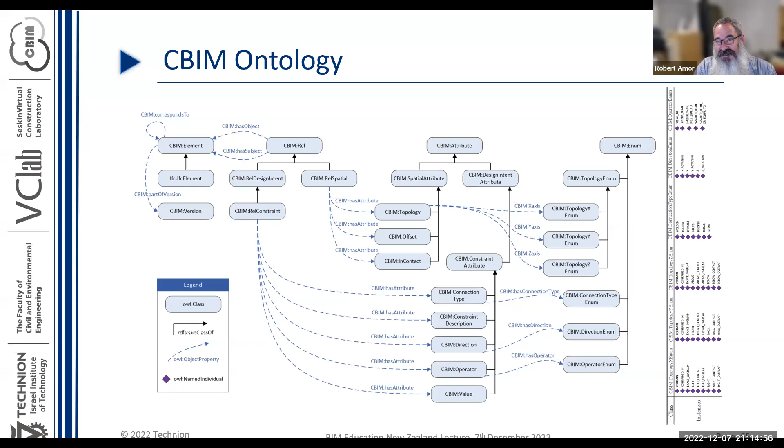So I guess over the years, I've been a bit of a Luddite about AI and what it's able to do. But more recently, I've been impressed and scared by what tools like GPT-3 and others are able to do in this area, in all areas of science and engineering and architecture and arts and almost everything they've been applied to.

And I guess my question is, I wonder if those sorts of tools actually skip this process that we have, the need for ontologies, the need for deep insight into the domain, and through their statistical approaches actually give us solutions which don't need us to be able to model and understand our domain in this sort of detail.

And I'll give an example. From computer science, we've just been analyzing what GPT-3 can do on all of our first year computer science exams, and GPT-3 gets an A- basically. Not bad. It can take any of our exam questions and generate computer code to answer them at an A- level for our students.

And we've seen this. It's been tested in many domains, and is able to produce results which are incredibly believable and understandable. So for us, the question is, do we need to understand and model the detail in these areas, or are these tools really going to take us to the next step without having all of these sorts of models and constraints and understanding of our domains?

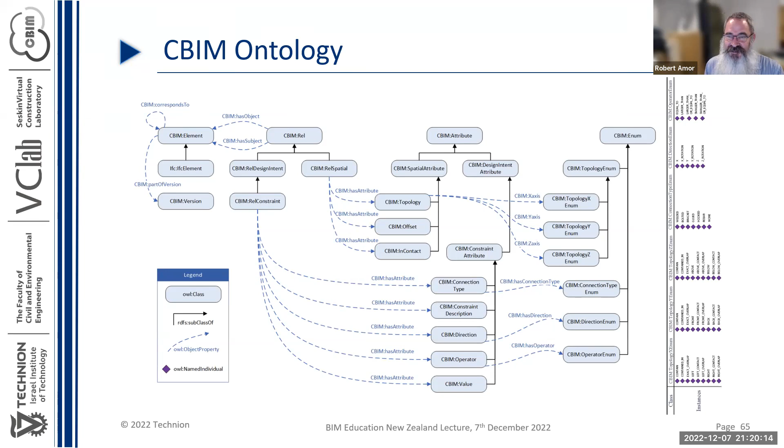Yeah, in New Zealand, everything submitted to the councils for code compliance checking is made publicly available. So every compliant building in New Zealand is on the internet somewhere. If other countries do the same, there's quite a large resource of compliant buildings which these AI tools can walk over and statistically infer what is good and what is not. Yeah, exactly.

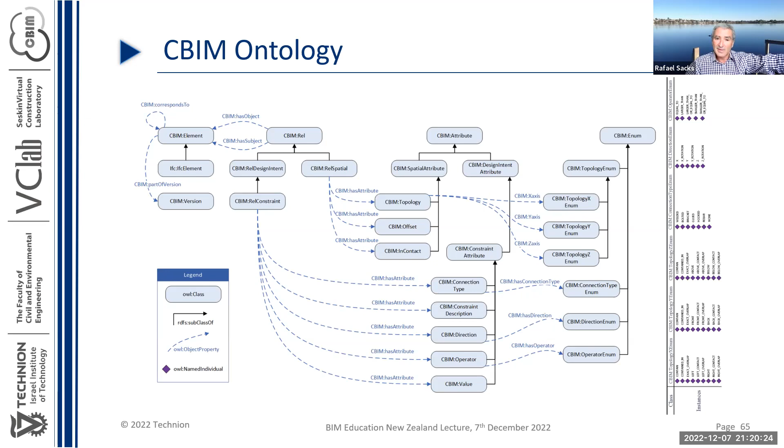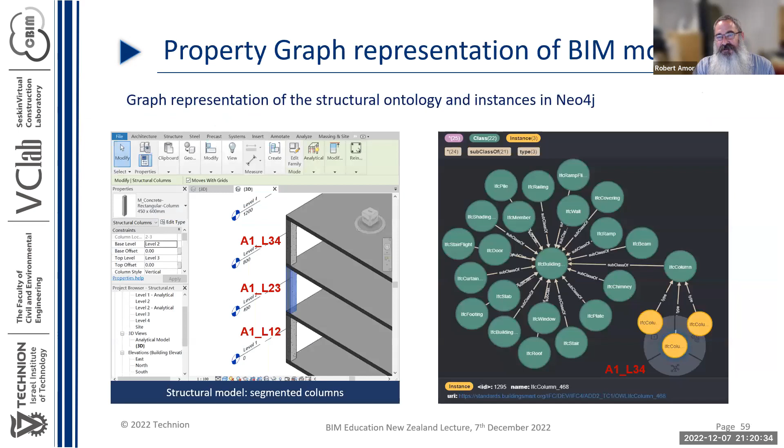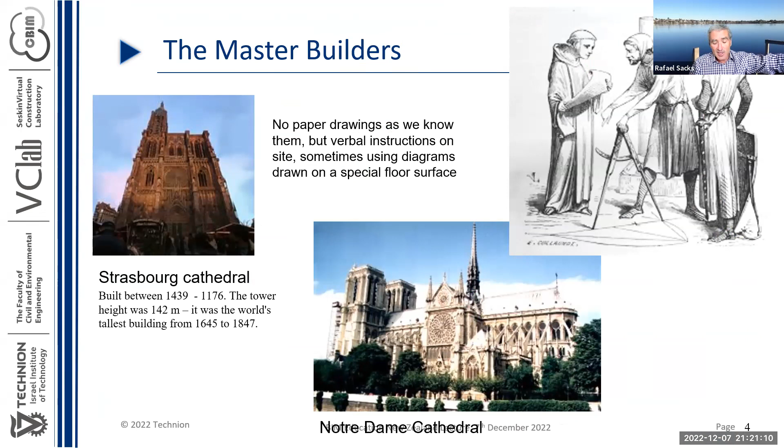I think that, you know, in any kind of product development of this kind, there are incremental steps and then there are major steps, paradigm changing steps. And I think that certainly the introduction of descriptive geometry and the parallel projections, these were major steps in terms of human understanding and development of tools. It's not unlike developing a car or something like that. But then things develop slowly with additional improvements, bit by bit, incrementally, until you come to the next major step.

And the next major step, I think, is not CAD, but is BIM. In the sense that CAD took computer tools and applied them to make descriptive geometry and parallel projection better. But there was no real paradigm change. We still produced drawings. We still produced cross sections. We still produced perspective views, just we did them faster and more reliably. But building modeling was a paradigm jump. And perhaps that's why it's actually taken much longer to spread through industry than we thought, because when we consider modeling things as objects with all their information, that's completely different from having a representation of them.

So the jump from descriptive geometry and CAD to BIM meant that we could now create actual prototypes of our buildings in the computer, prototypes that could be simulated, could be emulated even, and that we could use to predict performance in the way that, say, mechanical engineers could produce a prototype car, crash it against a wall a few times, and understand how it's going to behave. That's the kind of thing we could never do before. With good computer BIM models, we can do those sort of simulations, and that's a paradigm change.